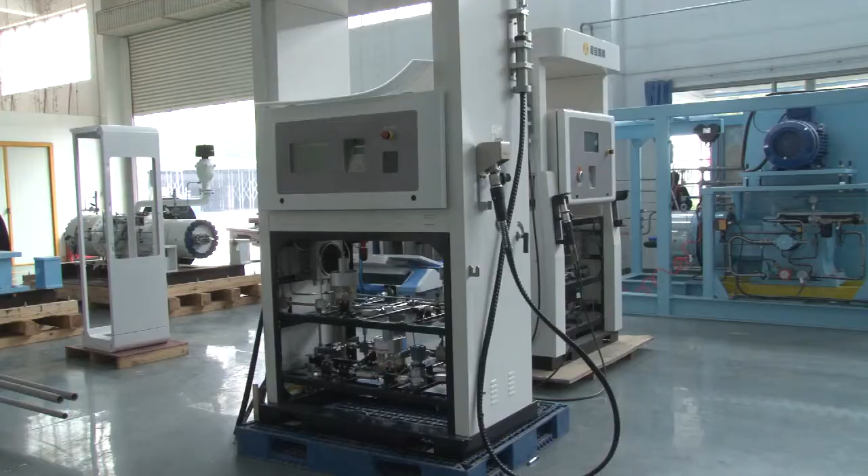Okay, in this workshop I have 6 areas. As you can see, this is the hydrogenation equipment area. We have a special live stream for that, so we won't introduce too much today.

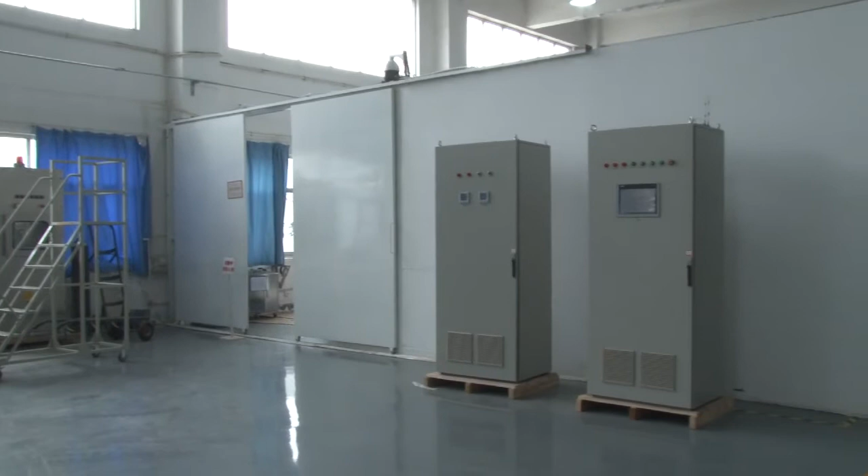Okay, next let's move to the high pressure testing area, which is mainly responsible for the testing of high-pressure equipment, such as CNG or CNG skid-mounted equipment inspection.

From the time the factory was established, our standards have strictly been in accordance with the highest standards in China and in the industry. In the high-pressure testing area, 2 compressors purchased from Italy are used as high-pressure gas sources to provide a stable air pressure of 35 MPa for the entire testing work.

All high-pressure equipment produced by Censtar company will withstand a pressure of 35 MPa in the test, which far exceeds the maximum pressure of 25 MPa of CNG and LNG equipment during operation. Through rigorous testing, we can guarantee the high quality of the factory equipment to the greatest extent and do everything possible to reduce the customer's cost.

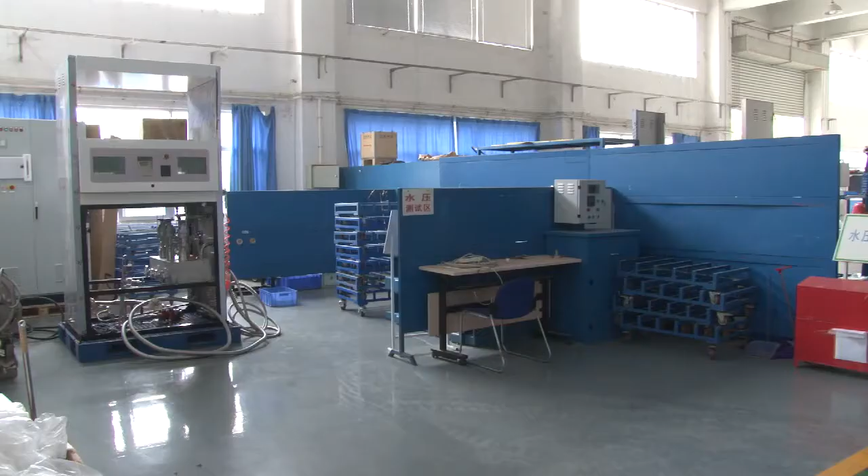Here is the water pressure testing area. This area is mainly responsible for the testing of normal pressure and low pressure equipment to ensure that the sealing of the equipment is intact.

Okay, next we see the skid-mounted equipment area, which is mainly responsible for the production of CNG pressure regulating skids, substation pump skids, LNG submersible pump skids, vaporized skids, BOG recovery skids, L-CNG pump skids, skid LPG pumps, and various types of gas-filled skid-mounted equipment.

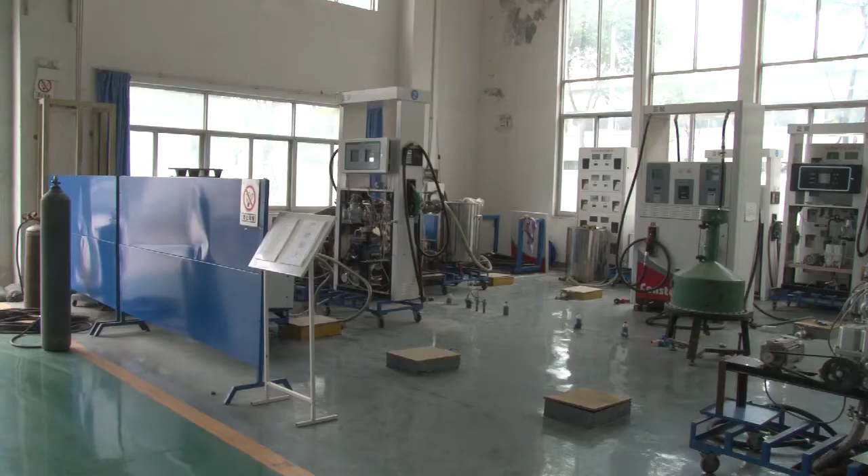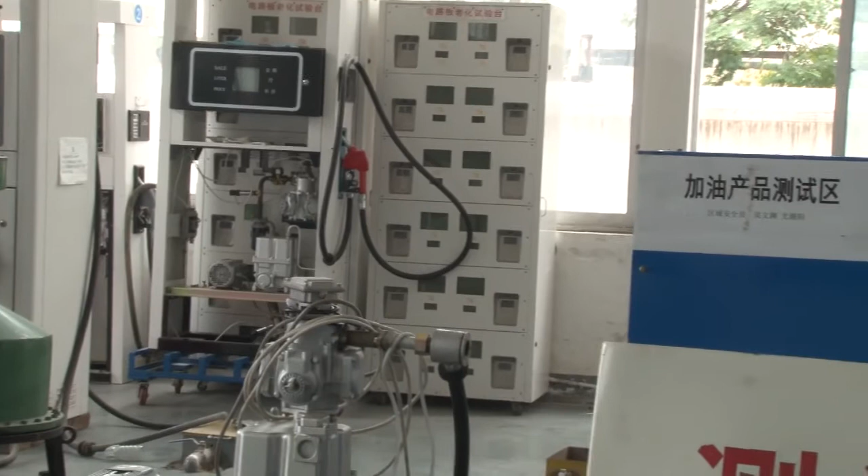Okay, let's move to this special equipment testing area. It is mainly responsible for assisting in testing some special equipment of Censtar company, such as special refilling equipment used for skid mounting or other unconventional equipment customized by customers.

Okay. Present production of gas station equipment of Censtar Group is mainly divided into 2 parts: Zhengzhou factory and Bengbu factory. The Zhengzhou factory is the factory you see now. It mainly produces various types of gas dispensers, hydrogenation equipment, and skid-mounted equipment. The Bengbu factory mainly produces various compressors, drying equipment, and various storage tanks. Due to limited live stream conditions, today we will mainly show you the Zhengzhou factory and the related gas station products.

This production area adopts an advanced U-shaped production unit model, and the materials prepared for assembly are arranged in a U-shape, which saves space and is easy to take, doing everything possible to improve production efficiency. The maximum production capacity in this area is LNG dispenser, 300 units per month, CNG dispenser, 200 units per month.

Present, the production of gas station equipment of Censtar Group is mainly divided into two parts, Zhengzhou Factory and Bengbu Factory. The Zhengzhou Factory is the factory you see now. It mainly produces various types of gas dispensers, hydrogenation equipment, and skid-mounted equipment. The Bengbu Factory mainly produces various compressors, drying equipment, and various storage tanks. Due to limited live stream conditions, today we will mainly show you the Zhengzhou Factory and related products, and the Bengbu Factory products we will cover in a follow-up introduction of the complete gas station.

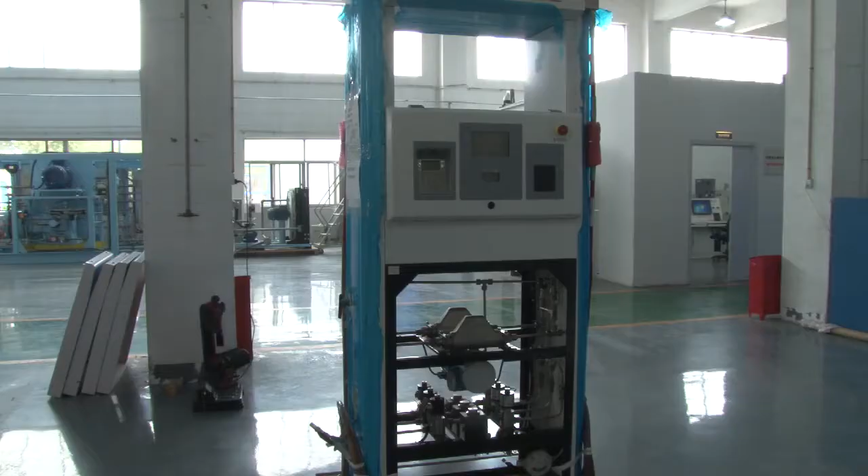In front of us is the CNG dispenser. CNG is a green energy compared to fuel dispensers. Censtar CNG dispenser is a self-developed refilling equipment dedicated to CNG refilling stations. Let's see the main parts.

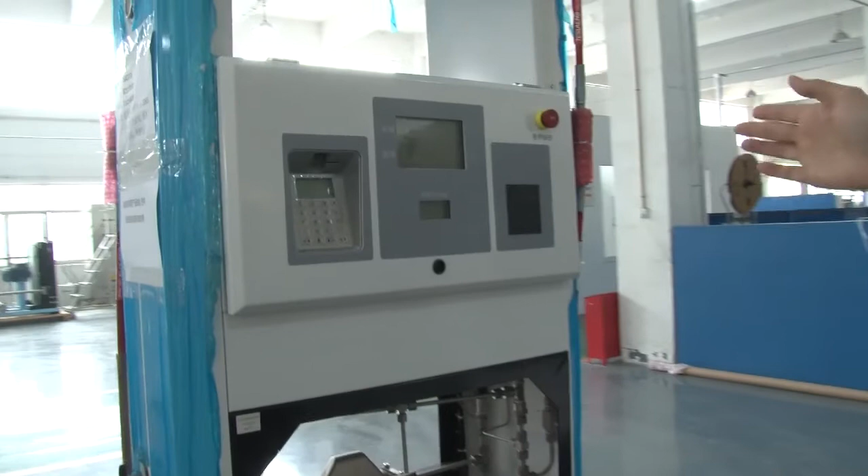Okay, here you can see this is the LCD display. You can see the unit price, volume, and amount. We will print it in English for foreigners.

Okay, here is the metal keyboard, the IC card port, and the IC card mode.

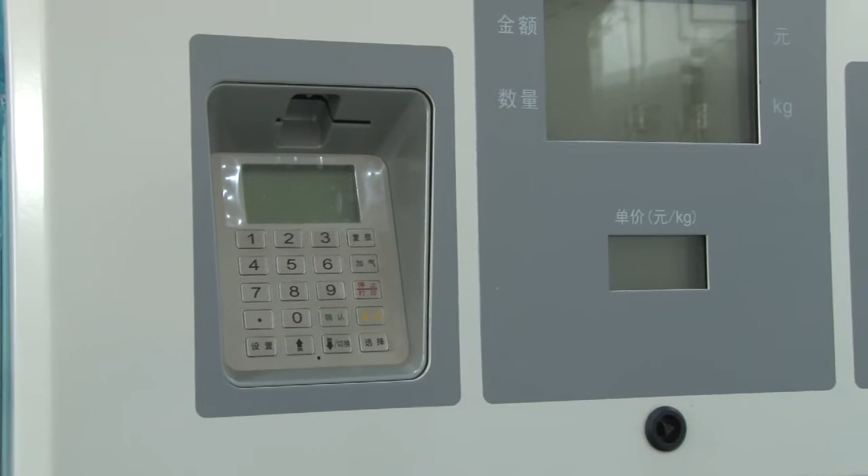The largest LCD screen will display the last refilling data as amount and volume line. The unit price line displays the preset unit price.

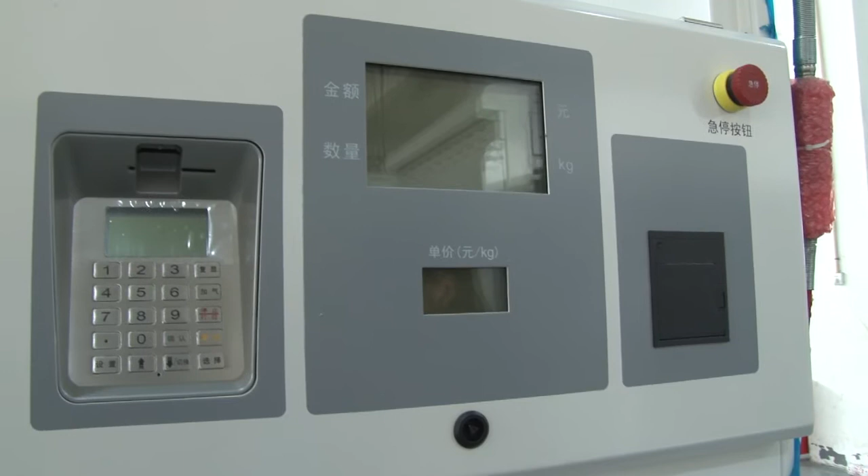The small LCD displays: please insert IC card. After the card is inserted, the card balance will be displayed in real time.

Accessible installation of IC card POS system, supporting various card types and standards. As for the printer, the customer can choose to install it or not.

Okay, this is the emergency stop button. Press it in an emergency and you can cut off the power supply, stop refilling, and trigger emergency stop of the whole station equipment.

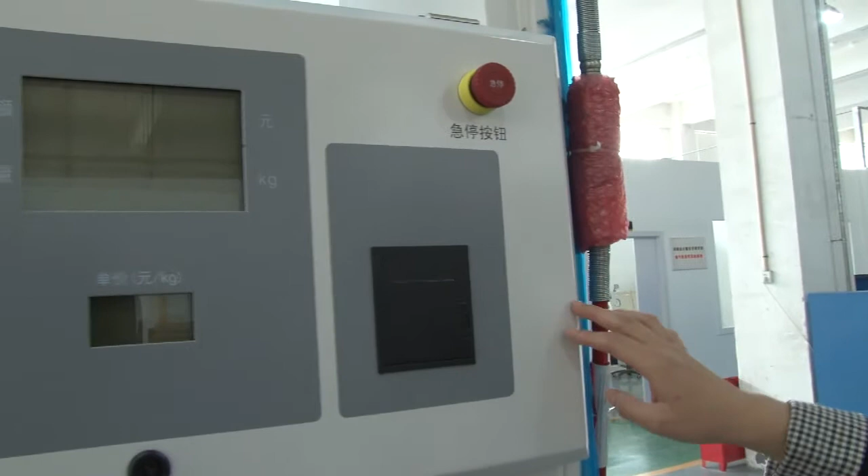Open the panel plate, and you can see the computer control system installed within the computer control box.

It is composed of motherboard, keyboard, power board, display panel, and keyboard, and so on, which are installed within the computer control box.

The circuit adopts a strictly safe design and a high-performance microcomputer motherboard to ensure accurate measurement display and reliable data collection and storage.

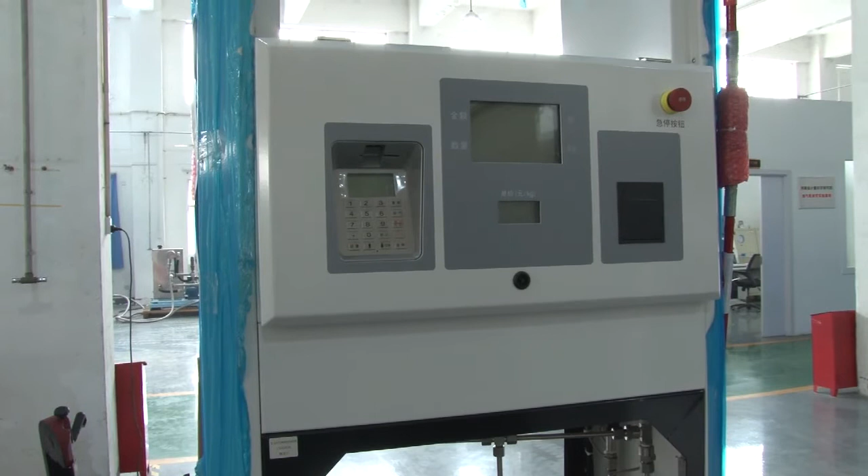Human-computer interaction design is reasonable and convenient, with anti-cheating design, card authentication, chip binding, program curing, and CNG display.

Encryption and lead sealing protection.

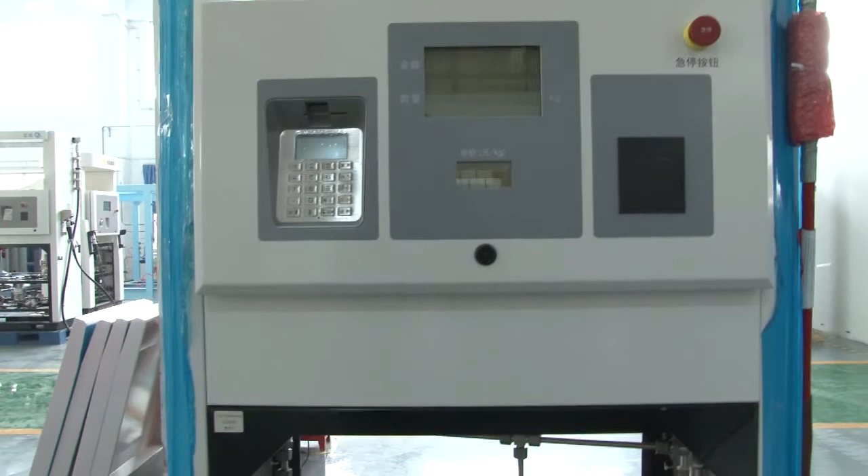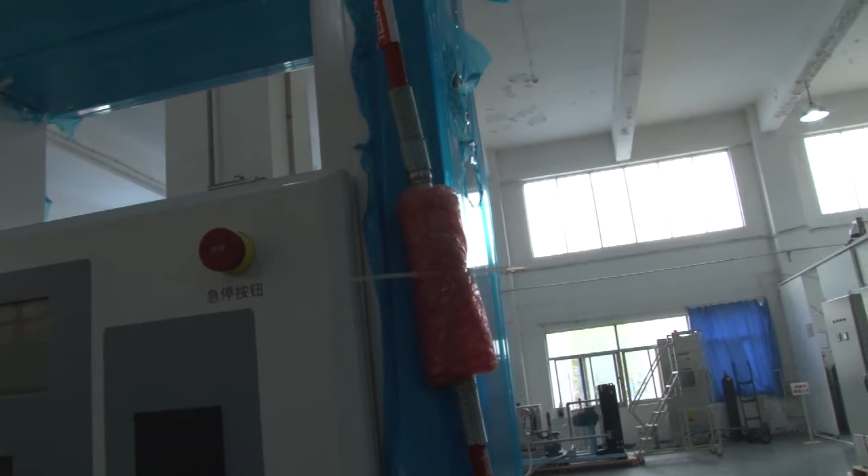Okay, here is the breakaway valve. In case of emergency, if the car suddenly starts without completing the gas filling or pulling out the fueling nozzle,

and the stress on the high pressure hose becomes greater than or equal to 400 N, the shaft on the breakaway valve will automatically separate.

Meanwhile, the gas source on both ends of the breakaway valve will be automatically shut off.

Here, the pipeline pressure can be displayed by a pressure gauge, and it also supports an electronic pressure display.

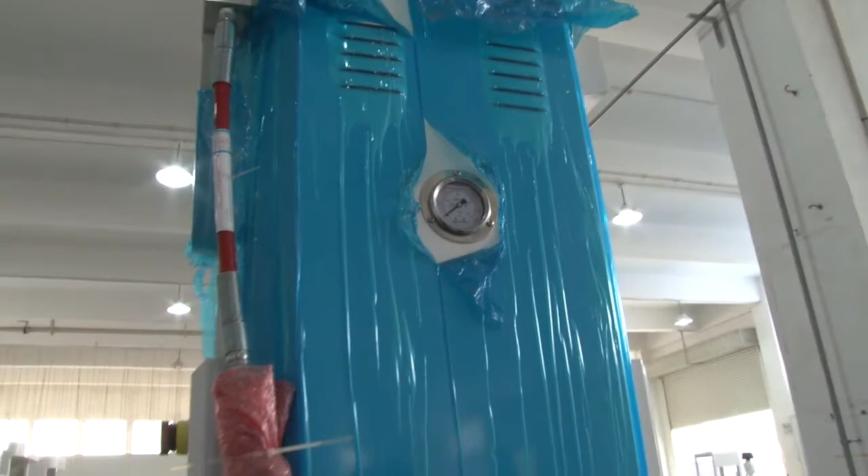Okay, let's look at the mass flow meter, used for the direct measurement of natural gas mass.

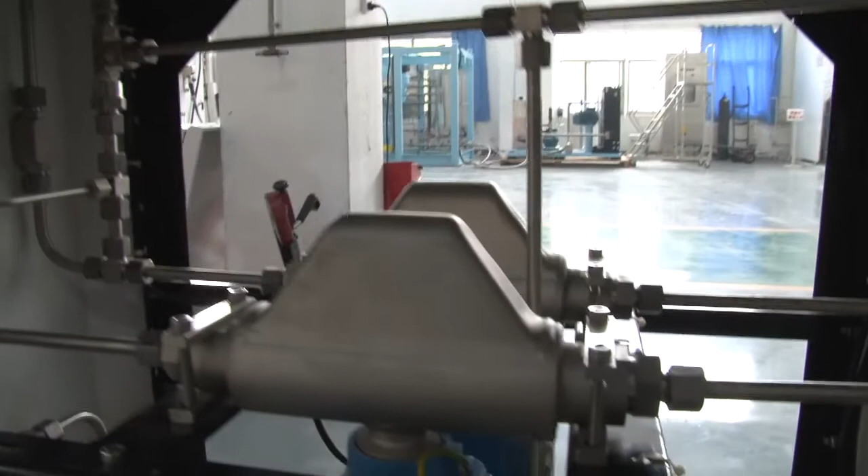The mass flow meter is composed of a sensor and transmitter, featured by high measurement accuracy and simple maintenance.

Currently, we have 3 kinds of flow meters: Chinese brands, E+H, and Emerson flow meter.

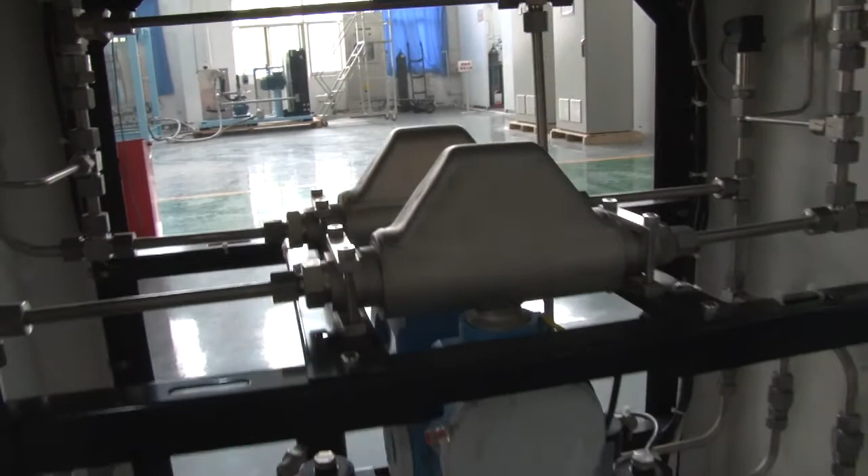Customers can choose according to their needs; especially the high-quality mass flow meter guarantees temperature and pressure compensation function.

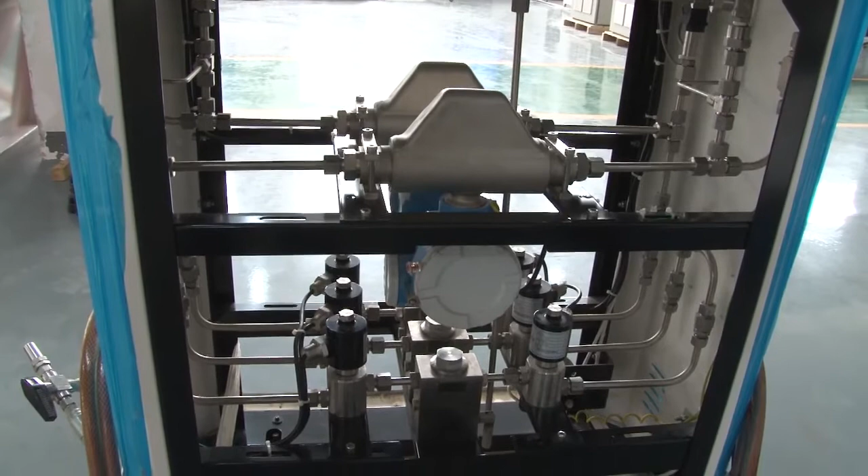The flow rate is 25 kg per minute for the standard type, and 28 kg per minute for the heavy-duty type CNG dispenser.

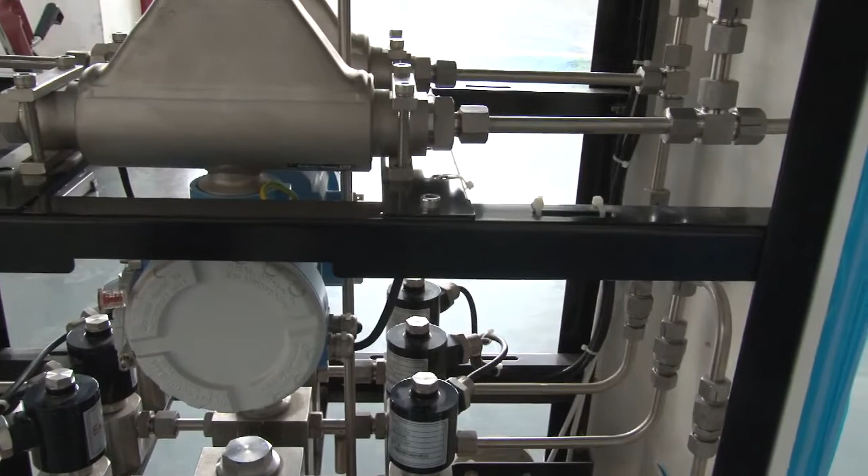Okay, here is the solenoid valve, used for security in opening and closing the low, medium, and high pressure in the gas path system to realize automatic gas refilling.

There are 2 types of solenoid valve in the gas dispenser: domestic and imported. Since the solenoid valve needs to switch on or off under high pressure, impurities such as water and

oil in the natural gas will directly affect the reliability of the solenoid valve.

The switch settings of the high, medium, and low pressure solenoid valves are adjustable to adapt to different air source pressures and reduce waiting time.

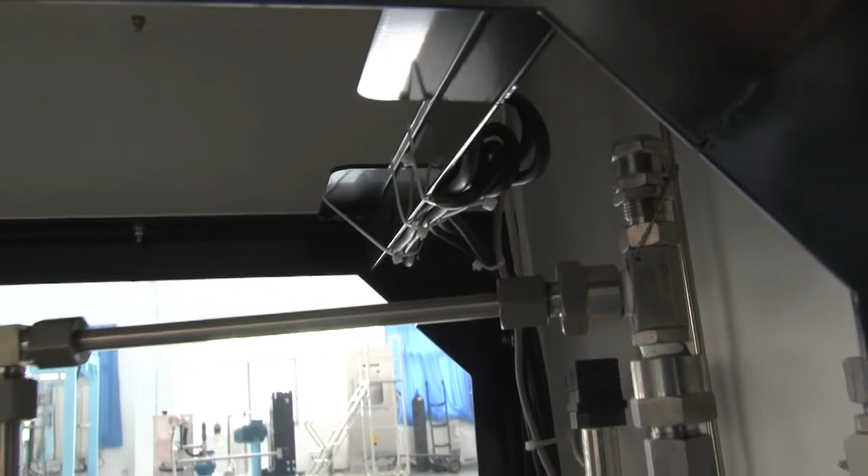Pressure transmitter, used for real-time monitoring of pressure in the gas dispenser line, connected with the control system of the motherboard that controls

the opening and closing of the valve to achieve security protection. Safety valve,

used to control the maximum pressure of the gas dispenser. When the working pressure is more than 1.05 times the setting valve value of 25 MPa, the safety valve opens to release pressure.

Filter, used to filter out impurities.

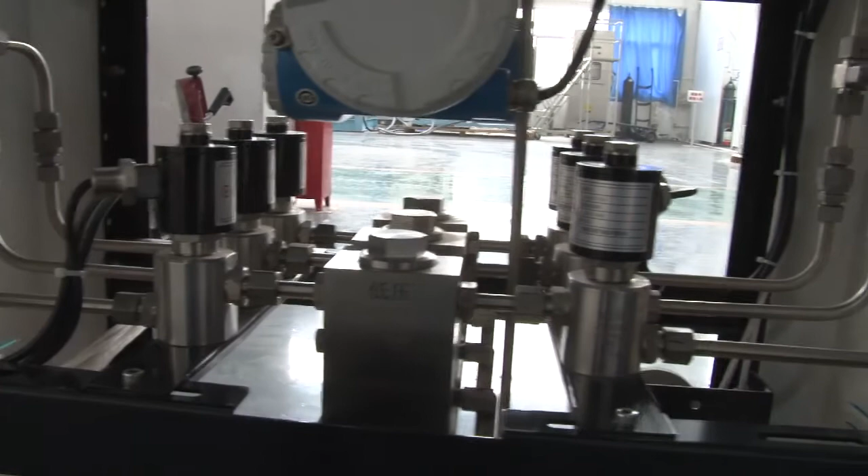Impurities of 0.04 millimeters or more within the gas dispenser are filtered out to ensure the normal operation of the solenoid valve and ball valve.

When cleaning or replacing the filter element, loosen the filter cover and take out the filter element.

Inlet ball valve. The inlet ball valve is installed at the air inlet to facilitate the maintenance of the whole machine.

Here is the explosion-proof junction box.

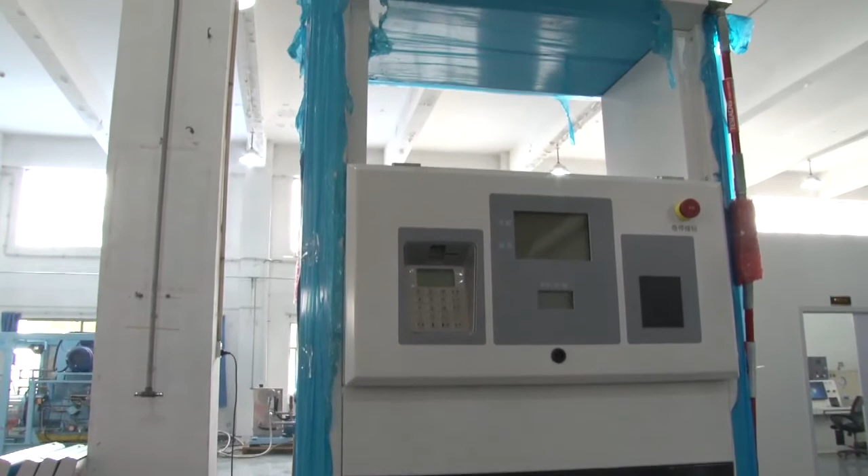The internal space of this machine is reasonable and easy to maintain. Models with different flow rates and components can be selected to meet the needs of gas stations of various sizes.

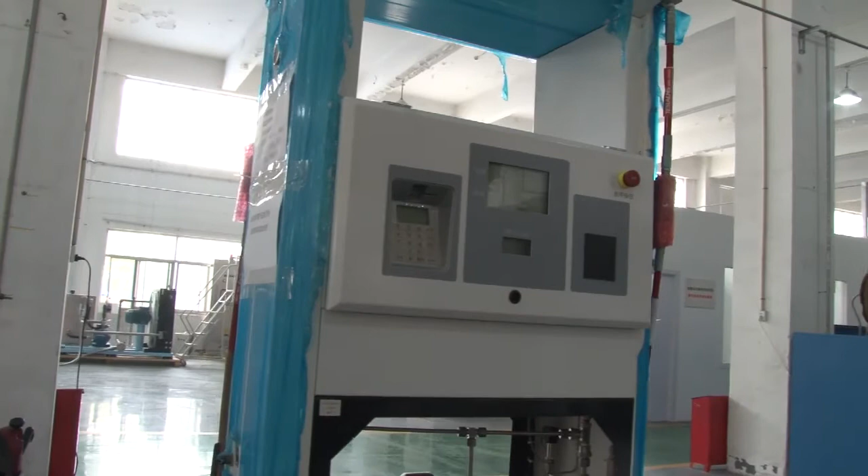Low power consumption design, double nozzles, 96 watt. Energy saving and environmental protection.

Okay, let's move on to see another dispenser. As you can see, here is the LNG dispenser, with explosion-proof grade of the whole machine.

We have the highest explosion grade in the same industry. The inspection and test work has been evaluated by the National Explosion Approval Inspection Agency and a certificate has been issued.

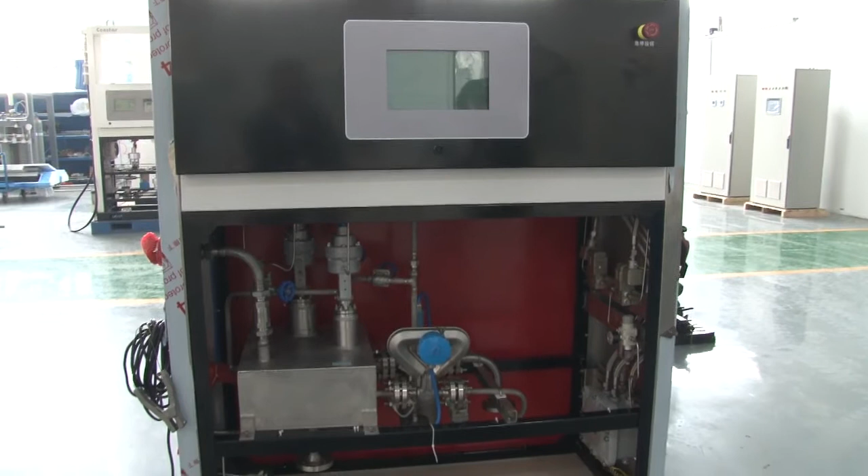Dispenser types: LNG single nozzle dispenser, LNG double nozzle dispenser. Single nozzle flow is 0 to 80 kg per minute. Input power is AC 220 volts.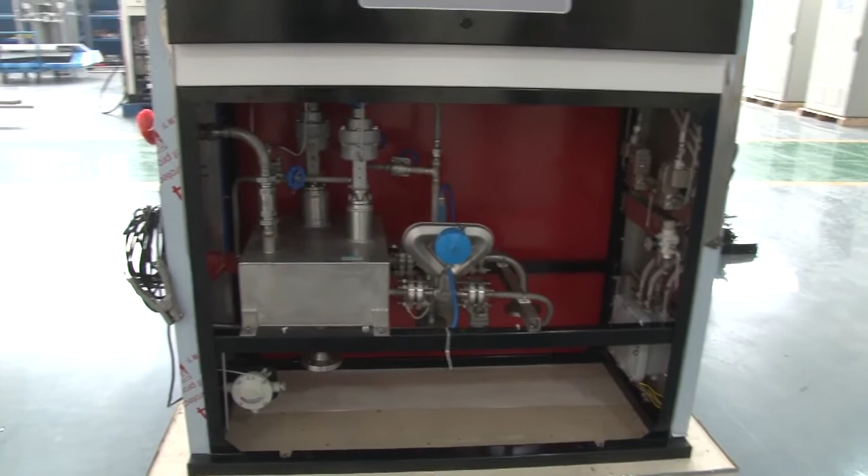Okay, here is the mass flow meter. It's a core measurement part of the gas dispenser.

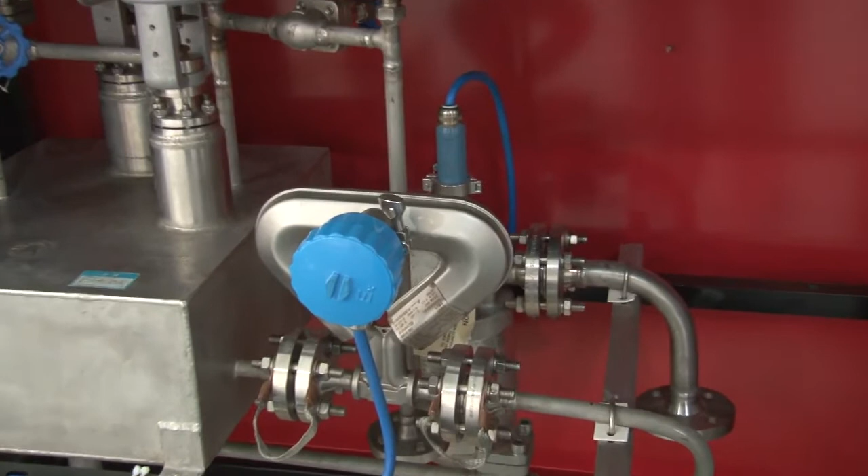Its mass sensor can detect mass, density, and other parameters of the medium through the gas dispenser and process them into the required output signal

It has no moving parts and has high measurement accuracy and a long useful life. Here is the filling nozzle.

The filling nozzle is used to quickly connect the filling port of the vehicle-mounted cylinder and is the final connection point between filling stations and the vehicles. It is frequently used, and its quality directly affects the business of a filling station. This LNG dispenser is for one of our customers, so it is still in production.

The model has two options: vacuum insulation structure and insulation material pipeline structure. The whole LNG dispenser is very easy to repair. The standard breakaway valve of the gas dispenser can automatically stop the machine when a charge pipe is snapped, so that the liquid will not leak.

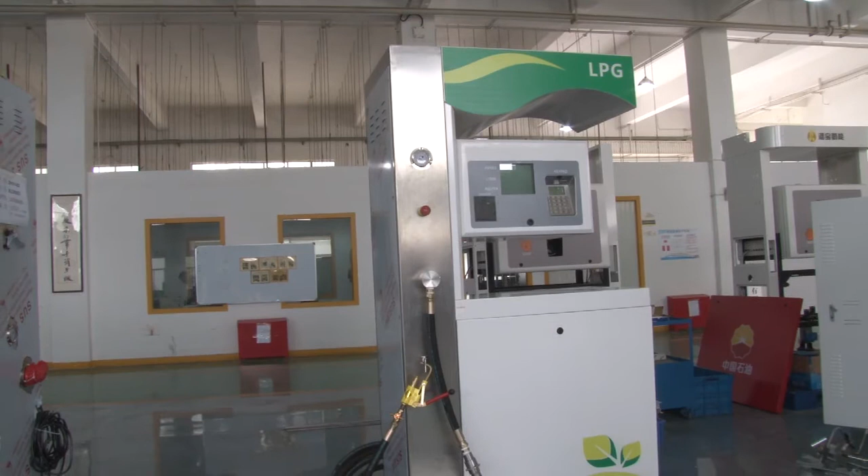Okay, let's see another dispenser, the LPG dispenser. As you can see, here is the LPG dispenser. This is our new model. Here is the LCD display.

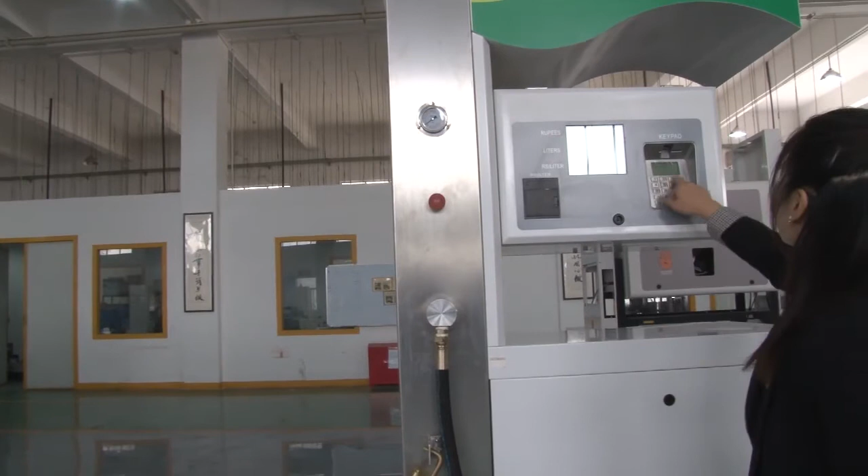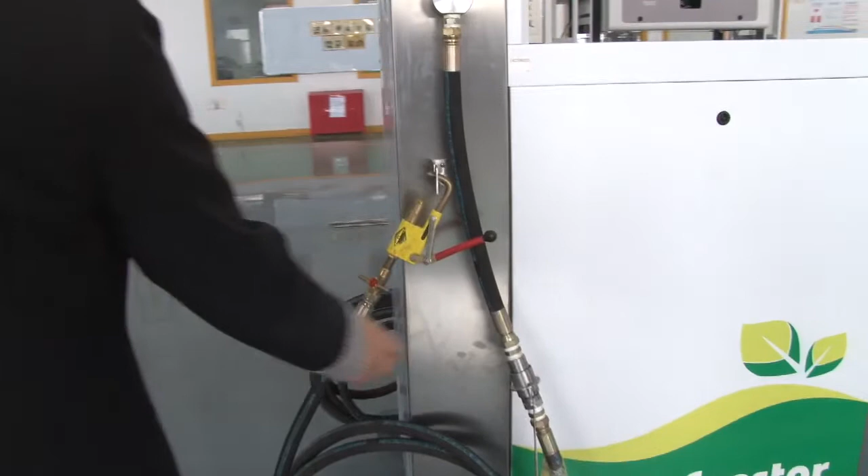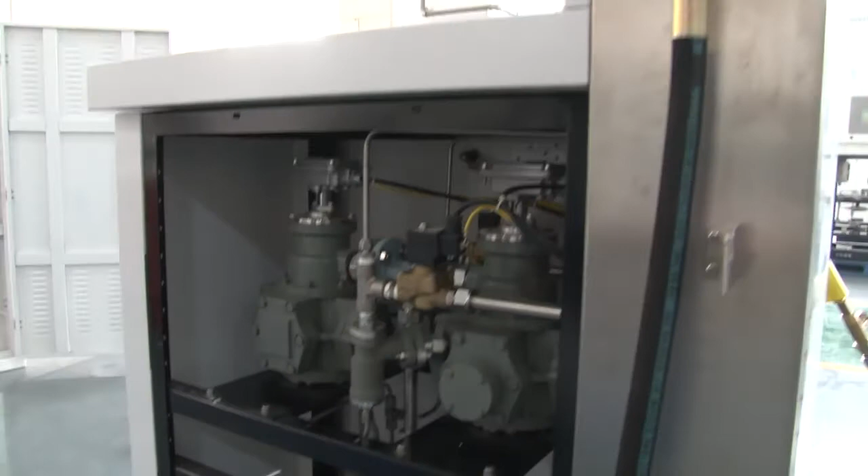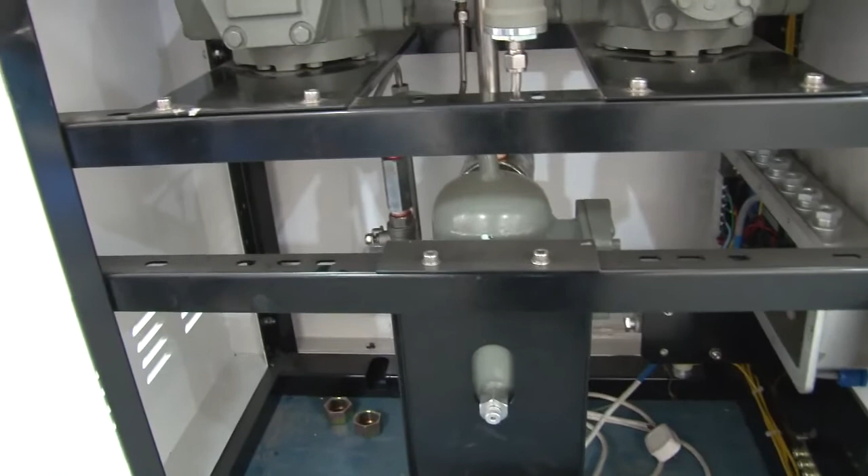This dispenser has two nozzles: this nozzle for cooking gas, and this one for refilling cars. We have two models of LPG dispenser, and you can choose the one you need: single nozzle and double nozzles. The LPG dispenser and skid-mounted LPG are more popular now. If you are interested in the LPG dispenser or skid-mounted LPG, you can leave your message, and our colleague will answer you one-to-one.

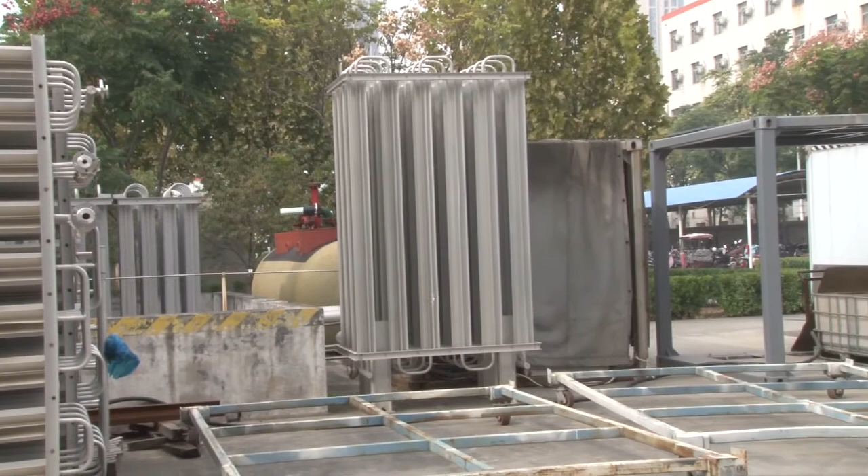Okay, let's move to another part. As you can see, here is the storage area for semi-finished products to be processed. This is the LNG vaporizer, a kind of heat exchanger specially used for the gasification of liquid natural gas. It is mainly used in large coastal LNG receiving stations, LNG liquefaction plants, LNG gasification stations, LNG refilling stations, and so on. It is key equipment to realize the gasification function. This was ordered by a customer from Nigeria, waiting for other materials to become a skid. Let's see the other parts and other products.

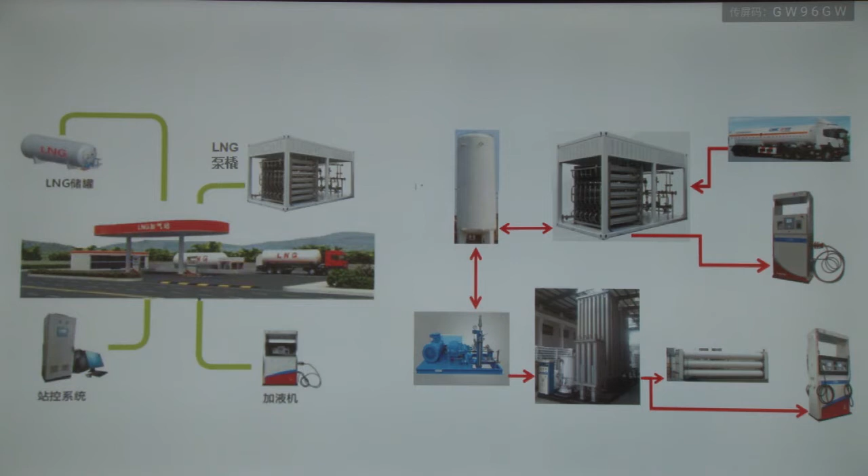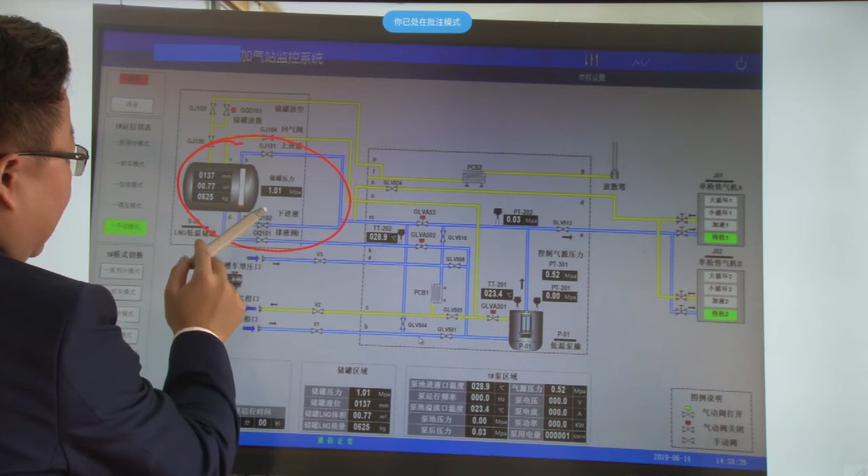Now I will introduce you to a PLC interface, which is now running an LNG station. This shows the tank, the LNG storage tank, with pressure at the inlet and outlet. This one is the LNG truck. This is the inlet pipeline, and this is the outlet pipeline here.

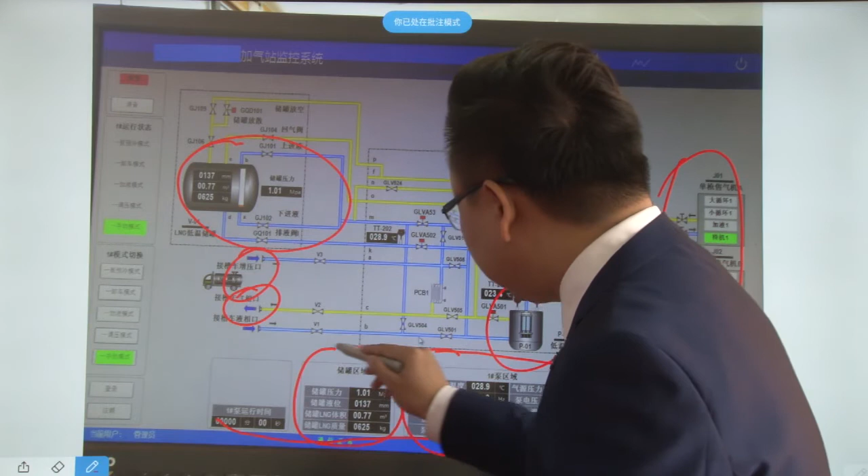And this one is the LNG low temperature pump, and here are two LNG dispensers. Below this, it shows the pump area. Here is the pump area, here is the storage area, and here is the current situation of the pump. So it shows every important place of this LNG station.

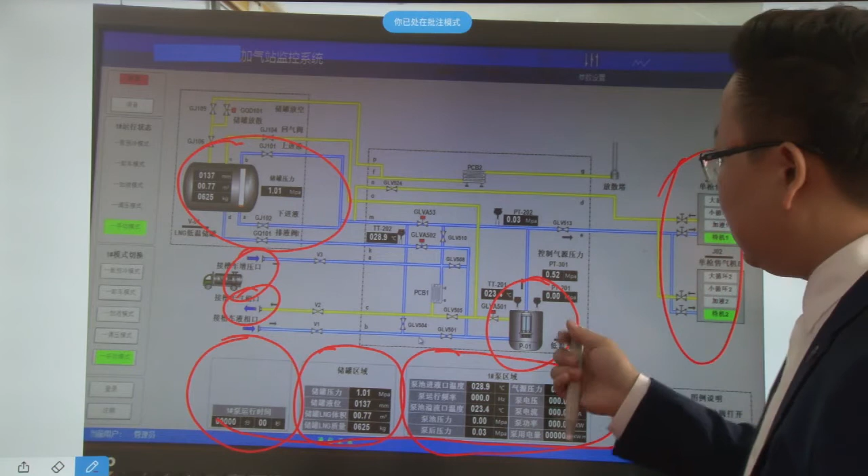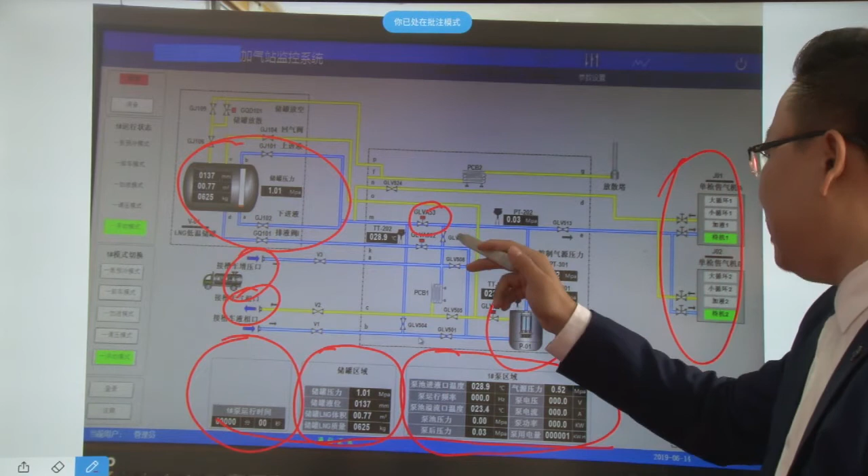Here it means green. When the color is green, it means the pneumatic valve is opened. And if it's like this, it means the pneumatic valve is closed. And these kinds of valves are all manual valves. So you can see every piece of equipment of this LNG station will be shown on the interface. That's the PLC.

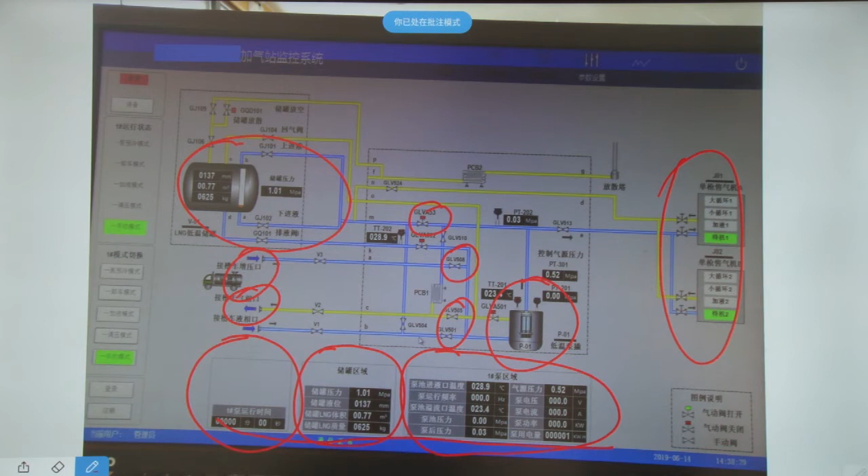In addition, in many countries and regions, considering the characteristics, LNG refilling stations are usually extended to L-CNG hybrid refilling stations. Its working principle is divided into two parts. The LNG filling part is the same as the ordinary LNG refilling station.

The LNG in the storage is skidded by the LNG pump and fed into the LNG vehicle through the LNG dispenser. But at the same time, the LNG in the storage tank passes through the CNG pump skid, the vaporizer skid, the gas storage cylinder group, and then the CNG dispenser into the CNG vehicle.

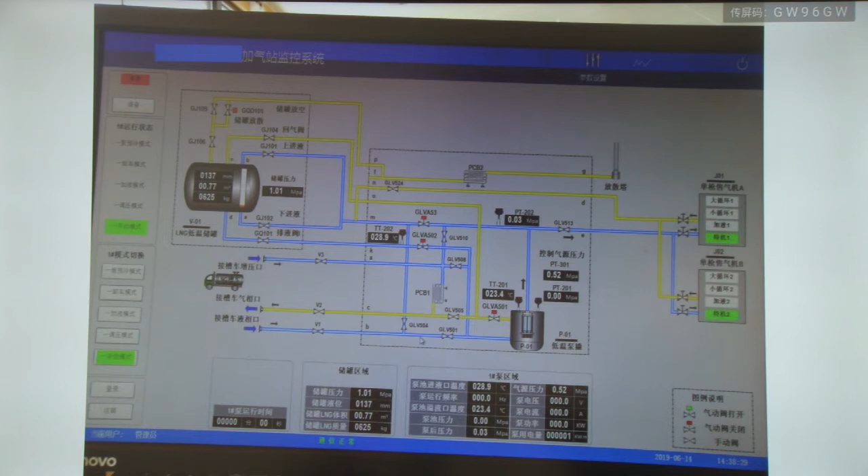Therefore, considering the economics of station construction, we recommend that customers who have both LNG and CNG needs consider building L-CNG hybrid refilling stations, which will greatly reduce your station construction and operation cost.

Now I'm showing you a PLC interface of a running LCNG station compared with the PLC in an LNG station. There is several different equipment. This one is the same. This is LNG storage, and this is the current situation of the LNG storage.

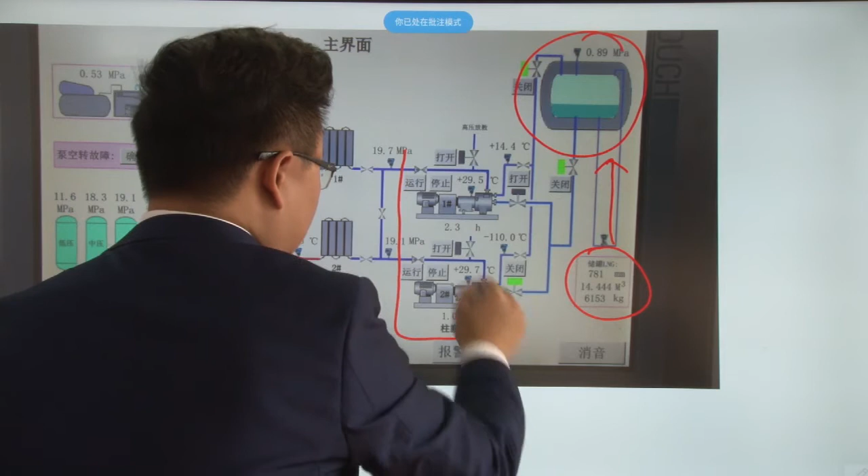But here, there are two pumps. These are CNG plunger pumps. And here are two vaporizers, high pressure vaporizers. These two pieces of equipment are different from the LNG stations.

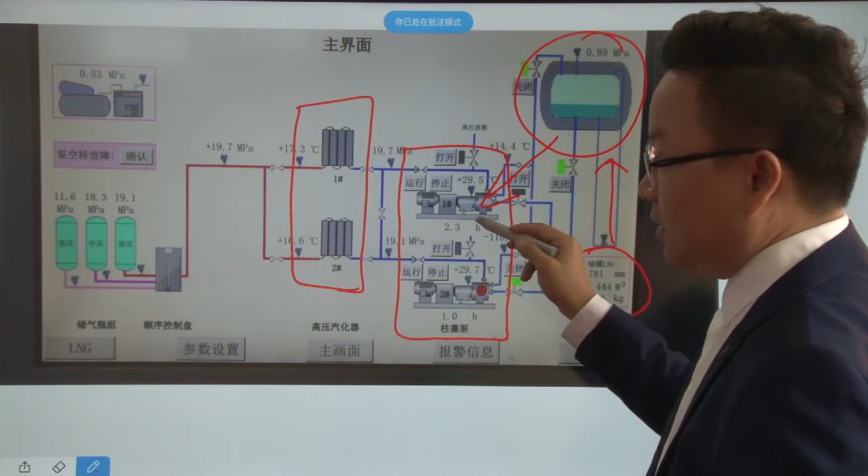It means the LNG tank, then the LNG through the LNG tank, passes these two pumps and through the vaporizer, then through this priority panel. This is usually used in CNG station priority panels.

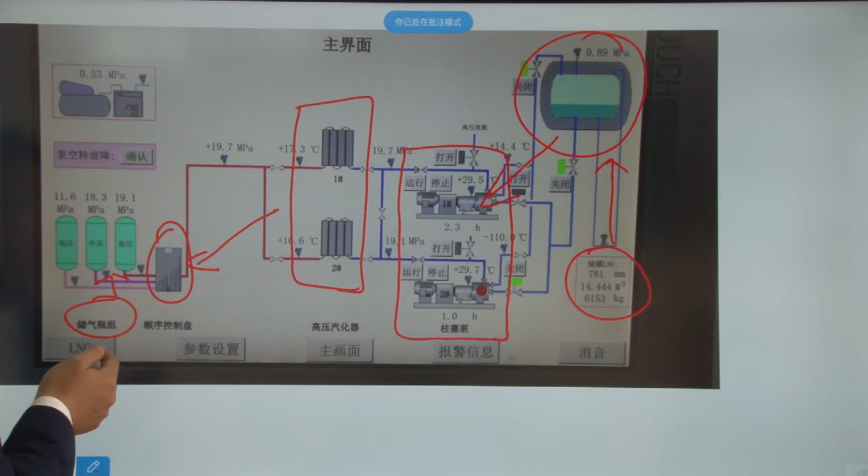And in the storage tank, here it's already gas, not liquid. This is the CNG gas cylinder. And after this will be the CNG dispenser. But for the CNG dispenser, it has its own management system, so it's not included in this PLC control.

For LNG hybrid stations, we can provide LNG storage tanks, LNG submersible pump skids, CNG plunger pump skids, vaporization skids, gas cylinders for CNG, boosters, EAG heaters, LNG dispensers, control cabinets, frequency conversion cabinets, instrument air systems, and the control system of the whole station. Also, we can complete the EPC project of the whole station.

Just now we talked about the LNG hybrid filling station, which is usually called an LCNG filling station in China. So let's talk about the CNG filling stations. The CNG filling stations are usually divided into mother station, daughter station, and standard station.

Among them, the process flow of the mother station and the standard station are basically the same. Both of them supply natural gas through the gas pipeline. Compared with the standard station, the mother station only has an additional loading dispenser, which is used to fill the large storage tanks transported by trucks with CNG.

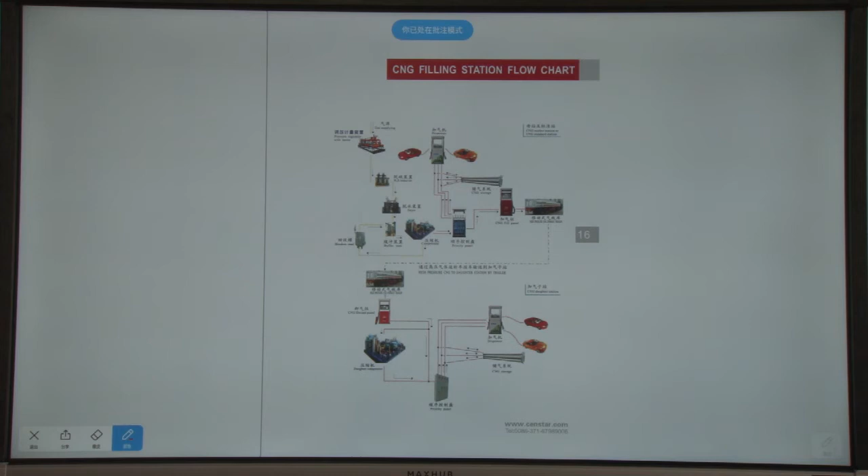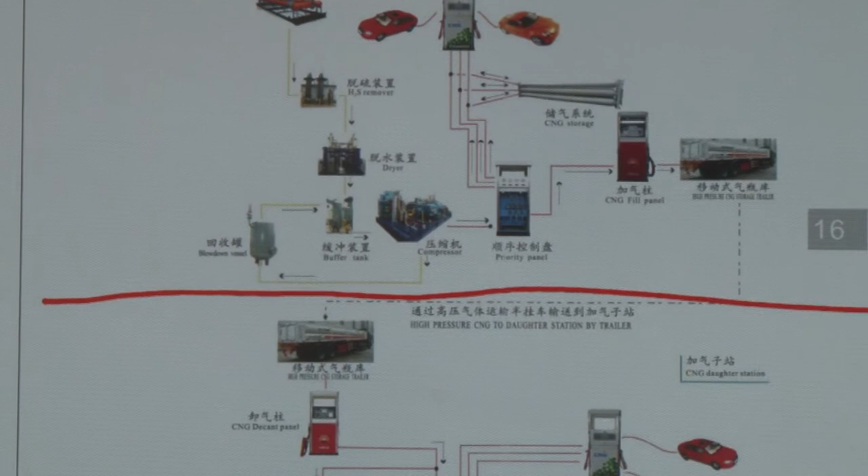Now, this is the CNG filling station flowchart. There are two parts. On the first part, this shows the mother station and the standard station. This is the gas pipeline, the gas through the pipeline.

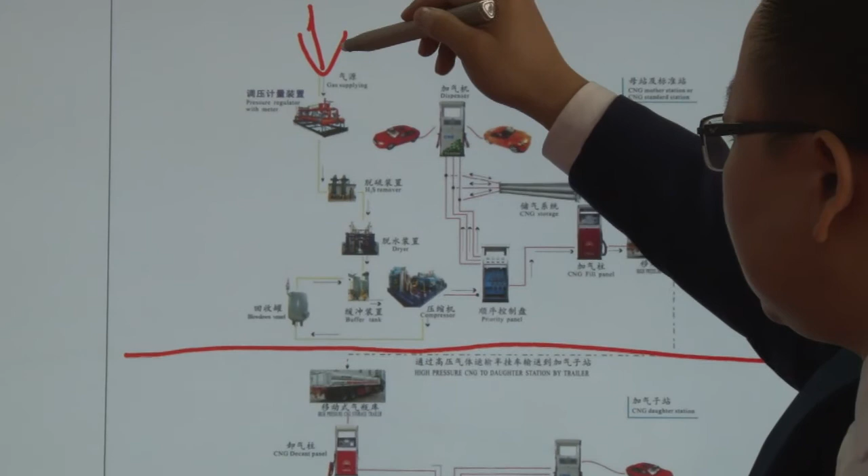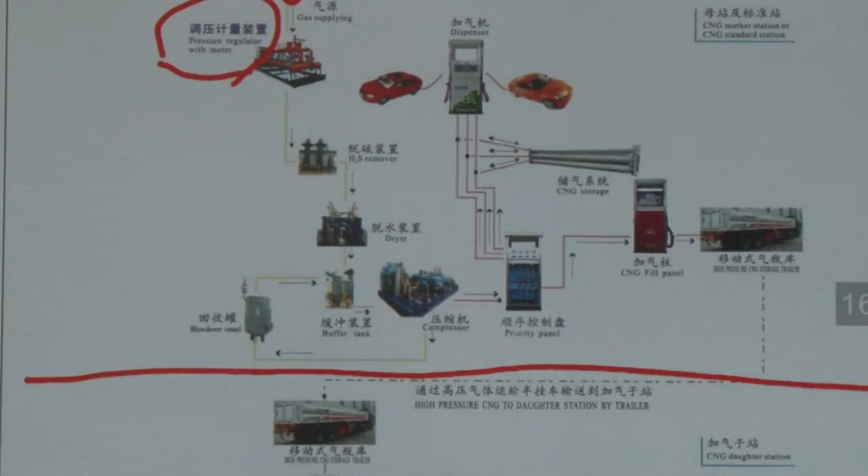The first one is a pressure regulator with the flow meter, because this flow meter is used so you can pay for the gas to whoever gave you this gas, either the government or a big company. And the pressure regulator - usually the pressure of the gas in the pipe is not stable. If you use this, it will make the gas more stable.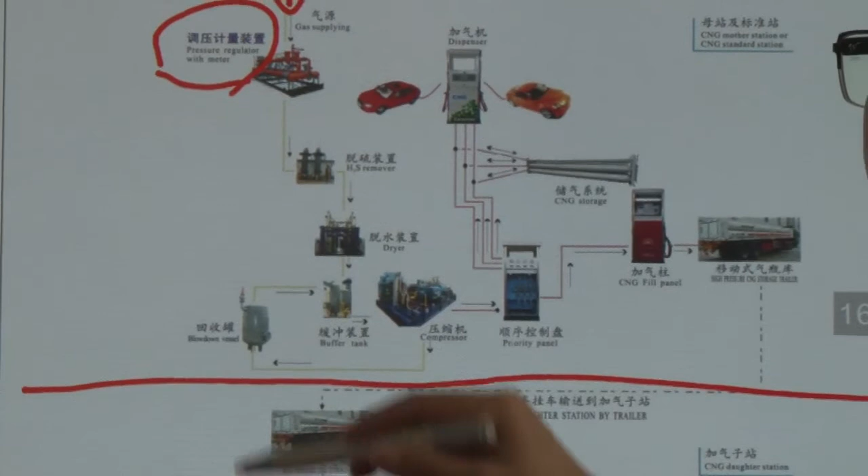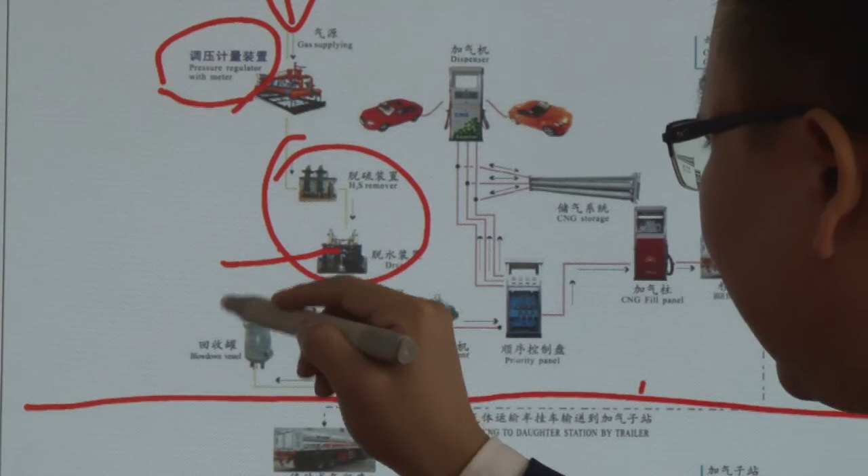After that usually comes the dryer and the H2S remover. But for export, sometimes the dryer will be after the compressor - this depends on the customer. If the dryer is before the compressor, the function is better, but after the compressor the size will be smaller and easier to transport.

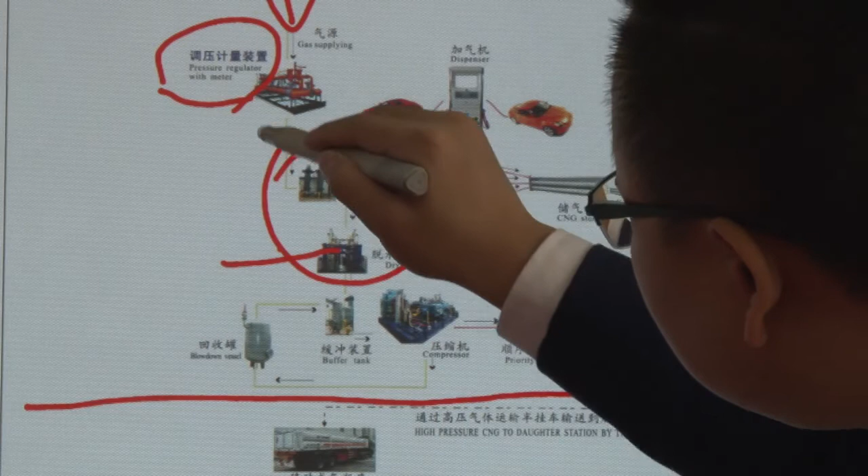The gas through these two parts will go into the buffer tank, filling the buffer tank. This tank is not very big - usually 1 or 2 cubic meters is enough.

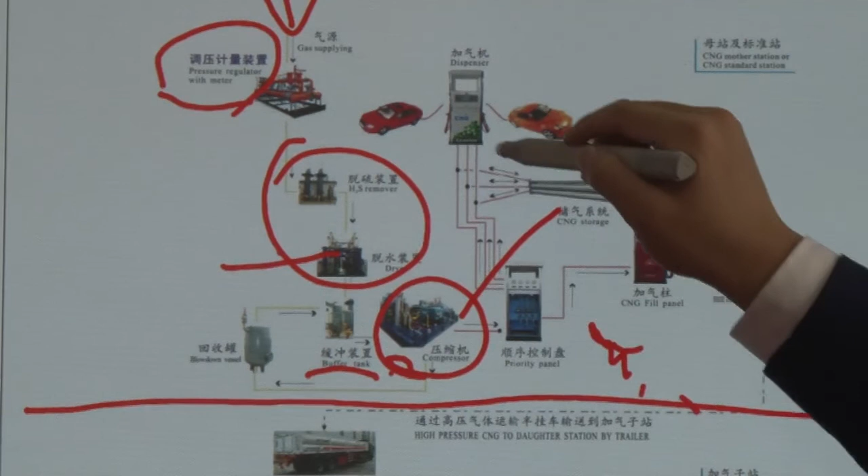After that comes the compressor. The compressor compresses the natural gas usually to 25 MPa. After that, the gas will fill into the gas storage, then through the dispenser to the cars, to the gas vehicles.

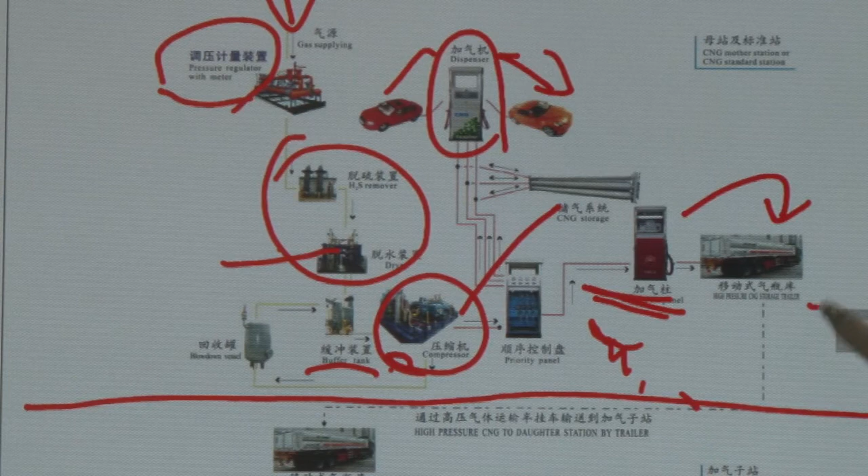If this is a mother station, there will be another one, this CNG Loading Dispenser. Usually this has a large flow rate for filling the CNG into this cylinder - a very big cylinder, a big truck. And these trucks are the gas resources for the daughter stations.

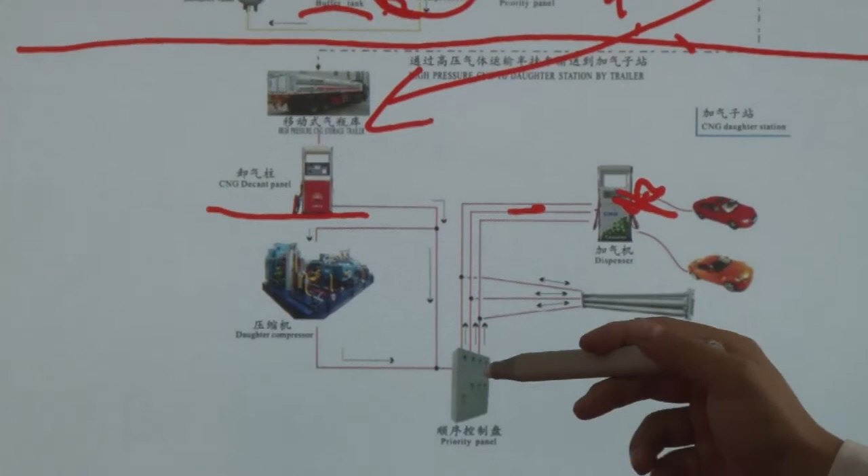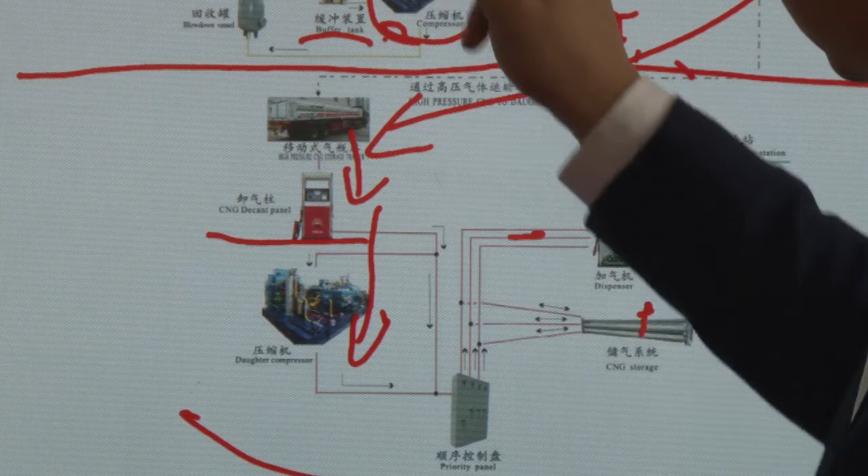This one also has a large flow rate dispenser - this one is called the Unloading Dispenser. It moves the gas from this cylinder through this dispenser to the compressor. But why? In daughter stations there isn't such as a dryer, maybe an H2S remover, not a buffer tank or what, because its gas resource already passed through this process, so they don't need this.

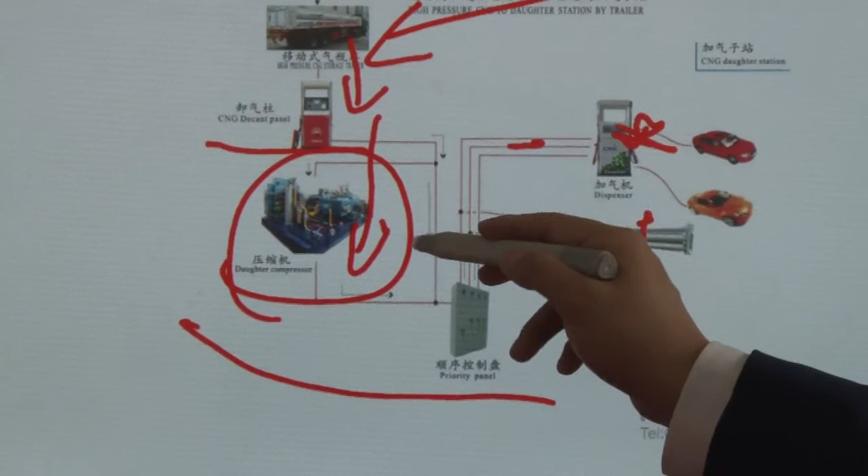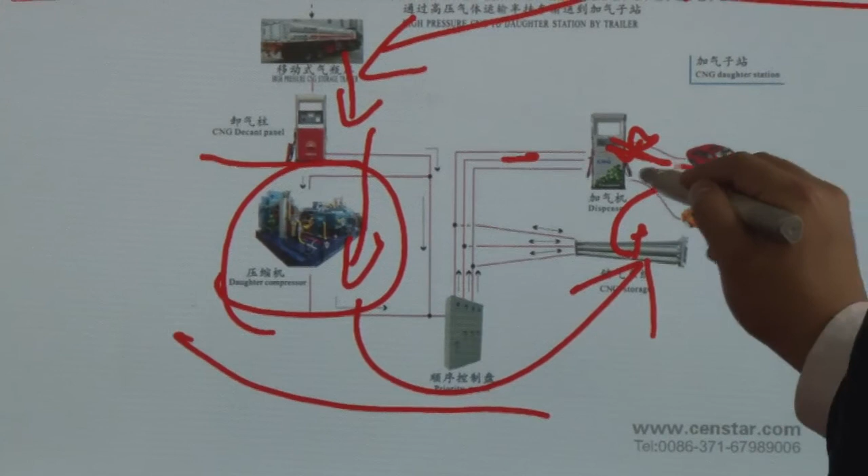Just after the compressor, usually much smaller than those used in the mother or standard stations. Also into the gas storage and then into the vehicles. That's the CNG filling station flowchart.

Compared with LNG refilling stations, the site selection of CNG standard or mother stations has one more restriction: it must be selected where the natural gas pipeline can be connected. Otherwise, the gas supply cannot be guaranteed.

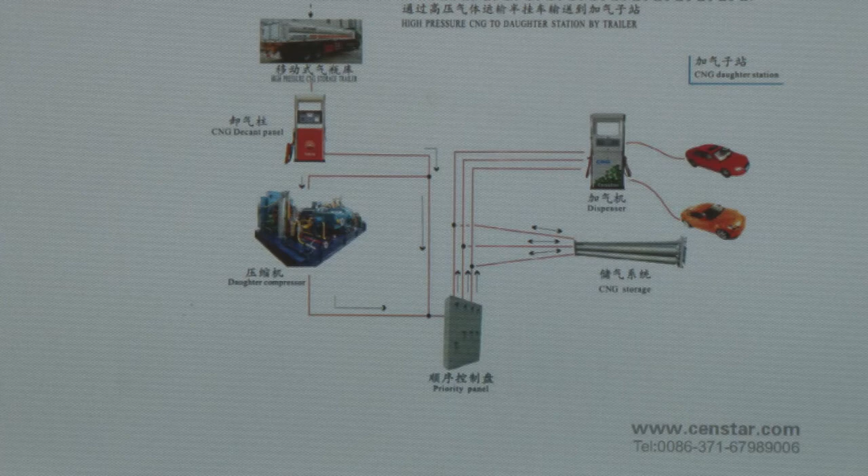The daughter station is similar to the LNG station. The site selection is relatively free, and the equipment cost is lower. But because the gas source required by the daughter station needs to be transported by vehicles, it's bound to continue paying the corresponding transportation costs. At the same time, because the equipment is less used and small in size, the CNG daughter station is very suitable for skid mount products.

We have already introduced the advantages of skid mount when we discussed the LNG skid mount. This is also one of the advantages of the CNG daughter station. However, the standard station and mother station, due to the large size of the compressor and the various types of equipment required, are not suitable for concentrating the entire set of equipment in one skid. But if the customer has high requirements for the convenience of equipment transportation, we can integrate it into two skids and simply connect the pipe before use.

How to select a site for a standard station or a daughter station requires a specific analysis based on local conditions. Now there are two examples for two countries.

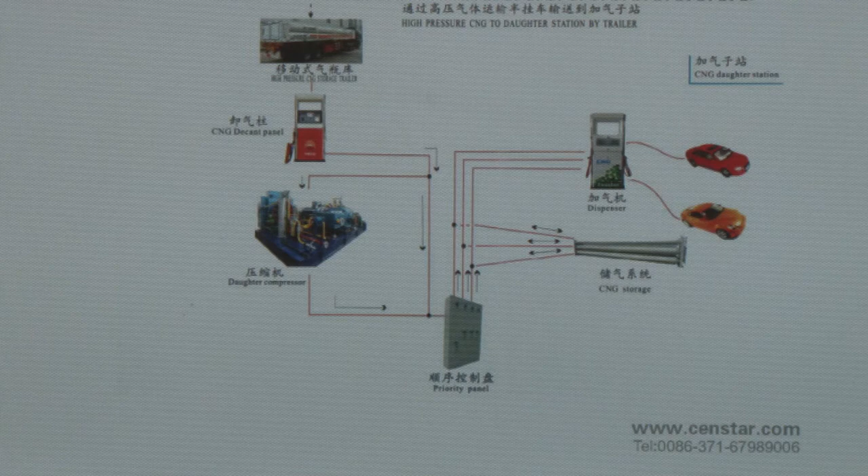The first one is Russia. As everyone knows, in Russia there are many LNG liquefaction factories and CNG mother stations. So if you want to build a new CNG station, it is very easy to get the gas source from the mother stations. The only thing you need to consider is whether there are already several or many stations established near your location. If there are not, and there are several or many CNG vehicles, you can build a daughter station, because you can easily get the gas cylinders by trucks.

But if you want to build a CNG station in Uzbekistan, the daughter station can't be chosen. The only one you can choose is the standard station, because in this country there is not one mother station, not one. You can just choose the standard station and use the pipeline.

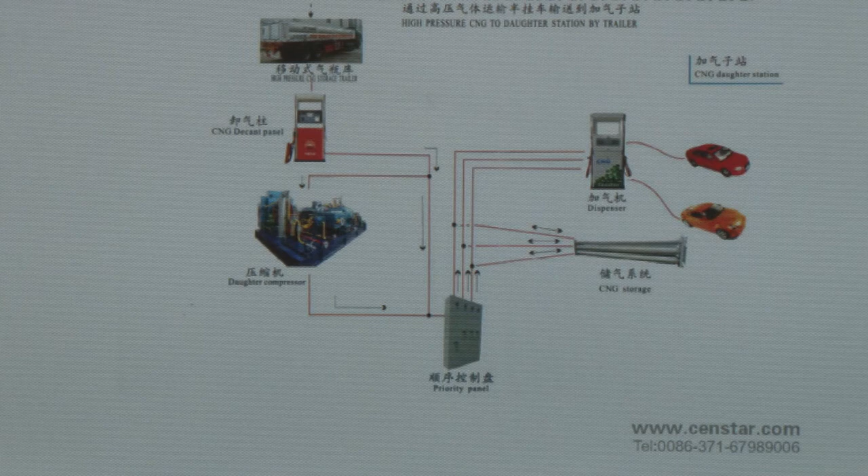For CNG filling stations, we can provide a complete set including standard station, daughter station, compressors, dehydration devices, gas storage cylinders, desulfurization devices, pressure regulating and metering devices, gas buffer devices, CNG dispensers, and loading/unloading dispensers. We can also provide EPC service for the whole station.

Finally, we introduce the LPG filling station. Compared with the first two natural gas filling stations, the structure of the LPG filling station is simpler and can be regarded as similar in structure to a gas station. Mainly through the LPG dispenser, the LPG is pumped out of the storage tank and filled into the LPG vehicle or household commercial gas tank.

The LPG station has a simple structure and can usually be made into an independent skid, placed in the gas station and provided as an additional service item for the gas station. Or it can be directly placed in a safe location to provide LPG filling service separately.

We consider the transportation cost when we receive a customer's LPG project. If the customer does not consider the skid mount solution, then we generally recommend that the customer purchase the storage tank locally, and we provide LPG dispensers and other equipment. If they consider the skid mount solution, we can use 20 or 40 foot containers to integrate the entire set of equipment and storage tanks into the skid mount according to customer needs.